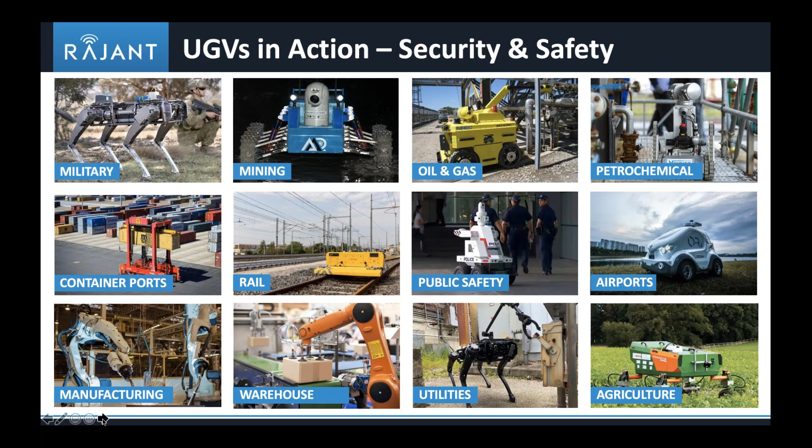Nothing really demonstrates this better than this animation, so if you'll indulge me, I'm going to play this video for you now. No matter the industry sector, every organization today requires a network that delivers real-time information reliably, anytime, anywhere.

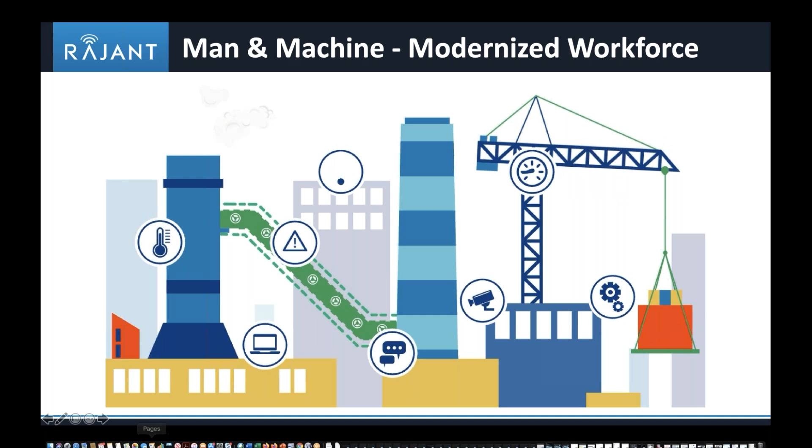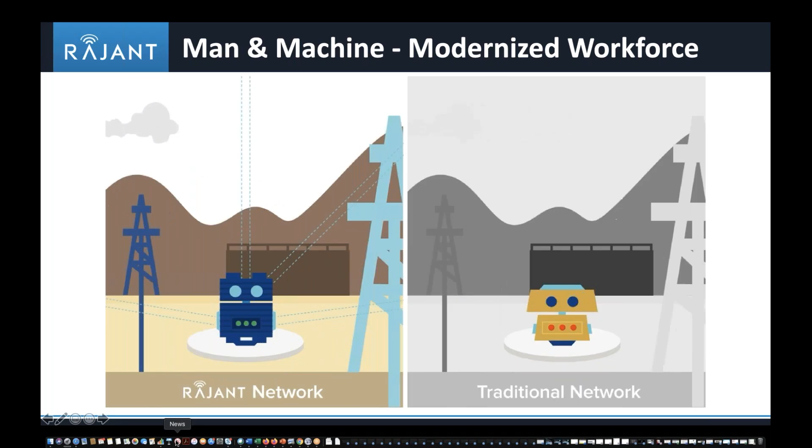Rajant's Kinetic Mesh is the only private wireless solution that can offer the level of mission-critical performance that modern mobile operations demand. That's because Rajant's multifunction breadcrumb nodes don't hand off like traditional wireless networks. Instead, our make, never break method of forming connections allows our proprietary protocol to switch instantly from one connection to another based on connection performance. Here's how it works. In a kinetic mesh network, all nodes are equal and can make multiple connections simultaneously.

A mobile or fixed node can direct traffic to any other nodes via multiple paths to ensure that you get vital information fast. Our patented Instamesh networking protocol orchestrates this traffic by always using the best path for each packet between network endpoints. With Instamesh, each node can maintain multiple peer connections simultaneously, making new connections whenever a peer comes into range, and retaining each as long as it is potentially useful to the mesh.

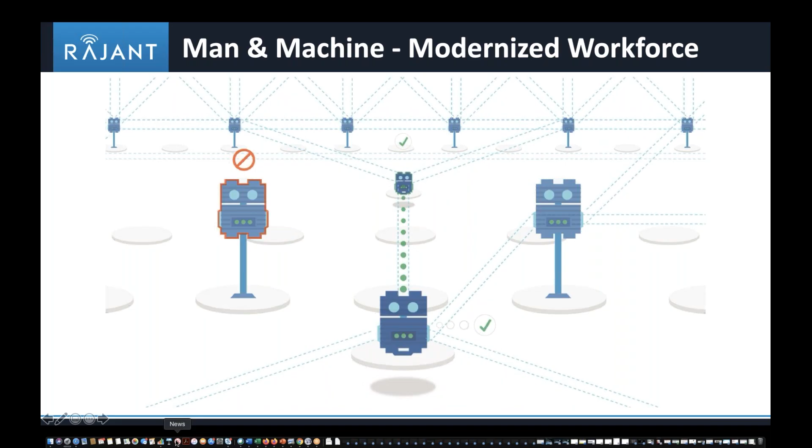If one path becomes degraded or blocked, the network will automatically redirect traffic to the best connection. As a result, connectivity remains continuous for reliable, real-time data delivery at low latency, even as the network grows. Kinetic mesh networks consistently outperform the competition in mission-critical scenarios due to their ability to make intelligent, autonomous routing decisions that result in a higher level of reliability, especially where mobility is required.

Take, for example, police responding to an automobile accident. With a properly designed Rajant network, dispatchers have visibility to the accident in real time. Police and EMTs have real-time mobile access to voice, video, and data to help coordinate first responder efforts while in transit, and can stream live video from the scene to required medical personnel.

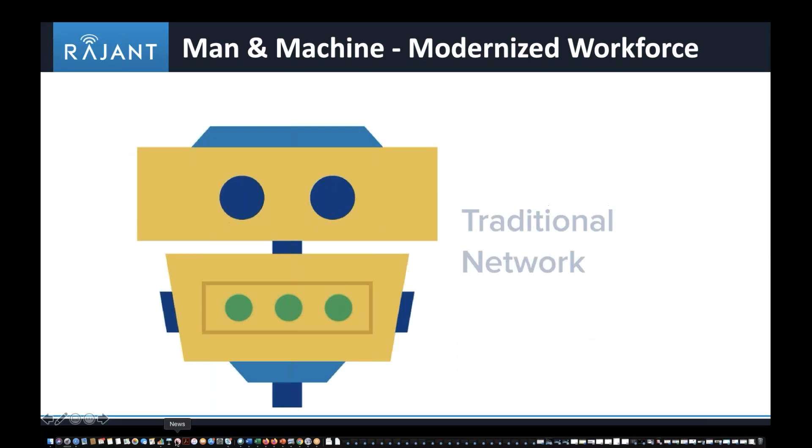By comparison, when mobility demands are high, traditional Wi-Fi and mesh networks often fall short. These networks typically employ break before make or make before break approaches to connectivity. In traditional break architectures, mobile nodes can only talk to infrastructure nodes, not each other, via a single connection.

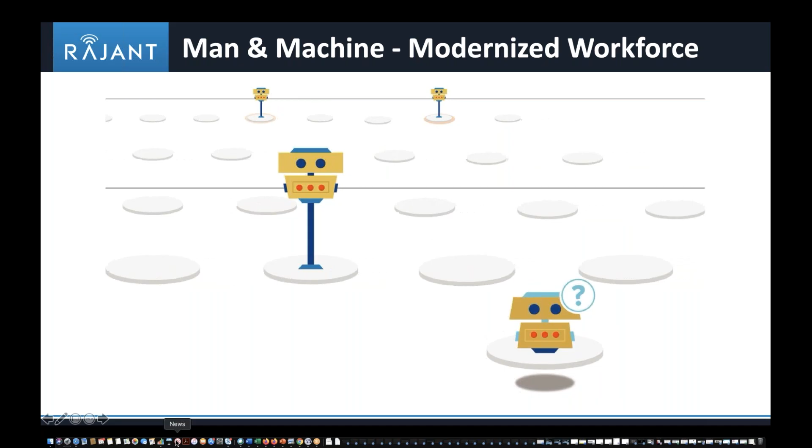When a mobile node leaves the range of its current fixed access point, it loses connectivity and must then find and reestablish a connection with the next access point along its path. Even if the network is able to scan for and determine its next path prior to handoff, it cannot use this newly made connection until the old one is broken. It still can only make one connection at a time.

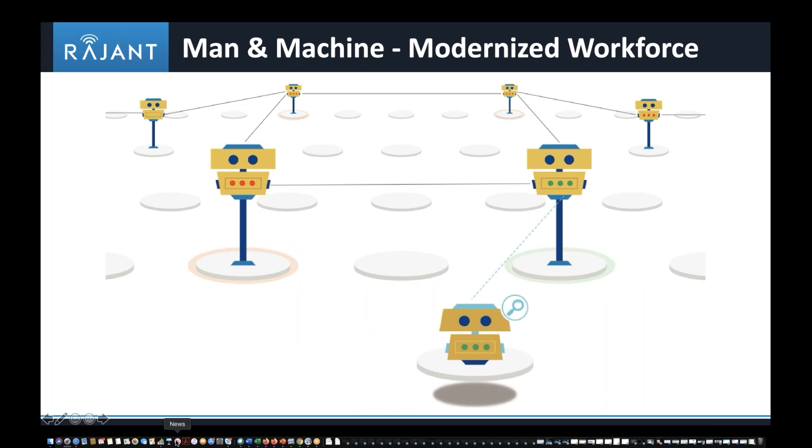Breaking connectivity over and over leads to dropped data packets, high latency, and compromised application performance. Degradation becomes worse when trying to scale to hundreds of roaming assets.

At Rajant, we believe that a network should adapt to support all voice, video, and data assets that reside on or traverse it, no matter how those assets change or move. We call this a living network. Don't settle for anything less than the mission-critical reliability of a living network, enabled by Rajant's make, never break approach. It's connectivity evolved.

To empower you with a deeper understanding that when it comes to supporting autonomous and robotic platforms, whether air, land, or sea, connectivity matters, let's meet Angela Quinn. A recent powerhouse addition to the Rajant team, Angela is a sales leader in the IoT and IIoT networking industry, as an individual and as a manager of global and national sales teams. Angela, the floor is yours.

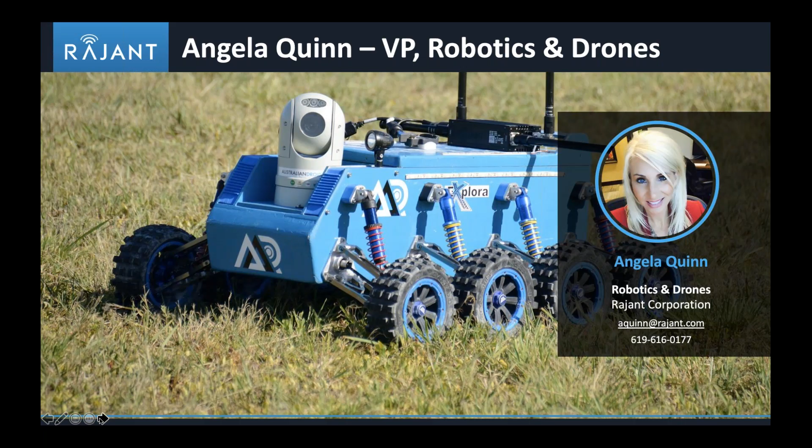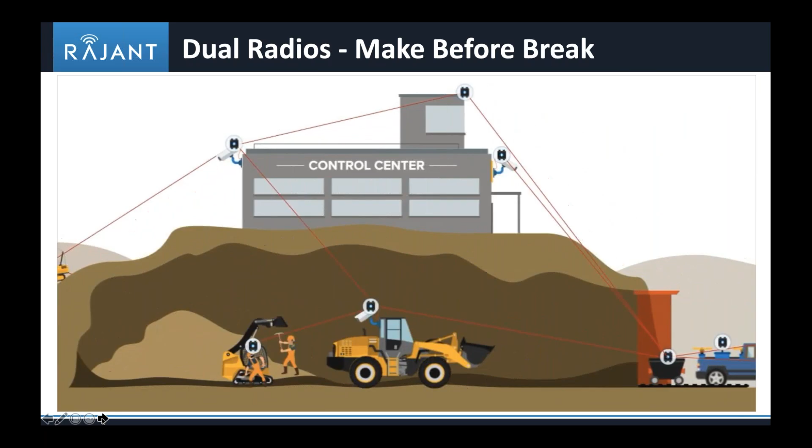In the next slide, we'll also be demonstrating, as you can see here, bots communicating directly, ground bots, as well as to buildings, cameras, manned vehicles, manned devices, IoT devices, and drones. This is a significant advantage as we are evolving and have evolved in small devices for the bots, drones, and IoT devices in environments, harsh environments where weather, dust, and environmentals are critical to success in mesh environments security-wise.

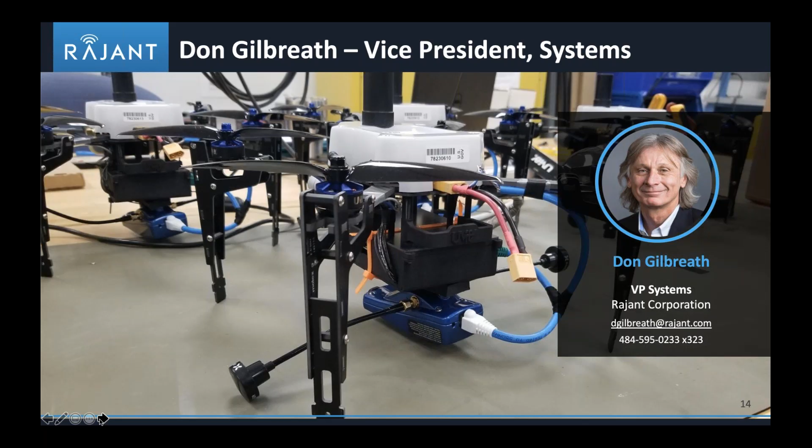What we've been using a lot recently is a new model, our DX2, which is our lightest model. It finds its way into not just aerial platforms, but some small, demanding kinds of ground robots. Next slide, please, Alice.

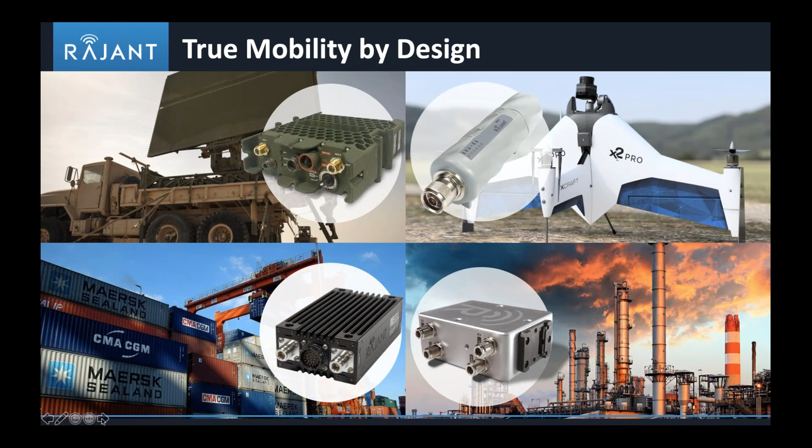That's called Offset. Offset's mission is a man-machine teaming operation with upwards to 250 air and ground robots, all interconnected and potentially operated by one operator, one swarm commander.

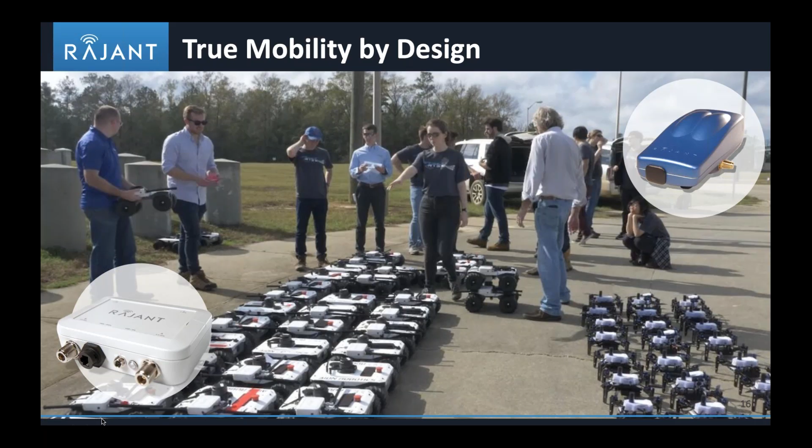Here's a great snapshot of a single team, a single fleet. There are about 70 or so devices here, and this was the February timeframe. Now we're starting to get out of this COVID lockdown area, and we should be turning on upwards to about 100 in the next month. The goal, again, is 250.

These ground robots don't have as much sophistication as some of the ones you're going to hear about next, but they do have simple LiDAR. They've got enough co-processing power to avoid falling off cliffs and running into each other. Their main job is to actually start doing gameplay. A classic example is these ground bots might be sent off to just explore an area, and DARPA made it easier for the play by providing QR codes called April tags, representing things like fuel or bombs, good things or bad things. When these robots come into scene, they find them.

Other robots are essentially bidding in real time to assist a particular find. A guy that might be a tanker says, "Hey, I need more fuel, or I could use fuel." And this level of gameplay is actually going on without any human operation. There is a swarm commander, but it's part of the gameplay: go explore, and robots that can help, please help.

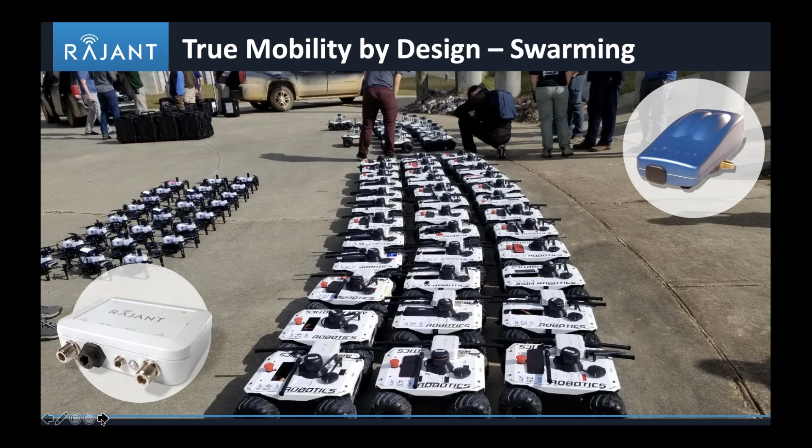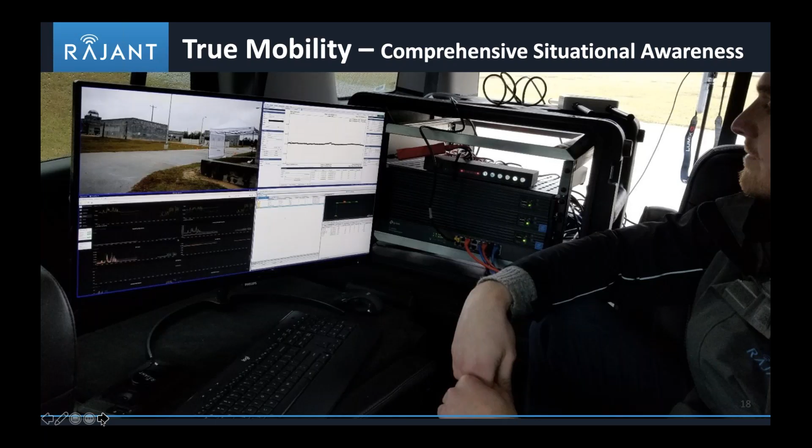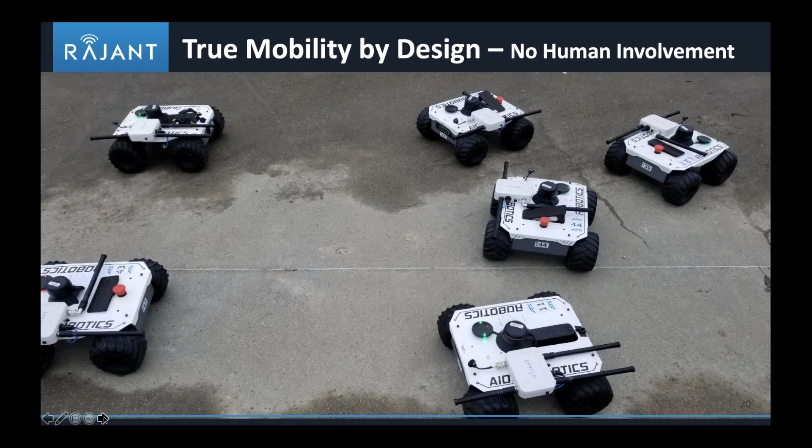This obviously plays well to public safety and fire, where you have this force multiplier of an operator who may have multiple robots, whether air, ground, or sea, that can assist in an operation—whether it's figuring out a fire line from a big fire, or breaching a building, or various applications that public safety might be using.

What's exciting to me is to see all of this truly distributed work come together, where there's not really a control room anymore. There's various stakeholders, but it's not the classic network that you would see, and it's not the classic robot case that you would see. That's why I'm very excited to be involved with this. I'd love to pass it on.

Yeah, those are super cool toys, Don. Thank you so much. Thank you.

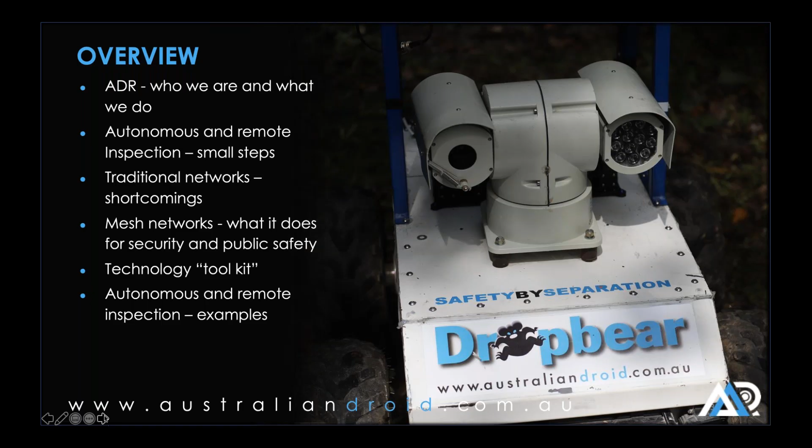Our mission is to provide safety by separation. So we provide, particularly for the underground mining environment, a range of high mobility robots that can be sent into areas where the ground is unstable, where there could be gas, or old workings where there hasn't been ground support for some time.

Typically it's gas sampling, laser scanning, and video survey. Again, we see separation, particularly the combination of new sensors, robotics, and artificial intelligence, allows you to separate personnel from hazards. We see separation as a new control, a new safety control that should slide into the traditional hierarchy of controls as the first choice.

As in security applications, military applications, and underground mining, there's similarity. You can't eliminate the hazard. It is part of doing your job. You can't substitute the hazard, but separation becomes a more powerful control than an engineering control. When an engineering control fails, the personnel and the hazard are still in the same place, co-located. But with separation, when that fails, your personnel are still safe.

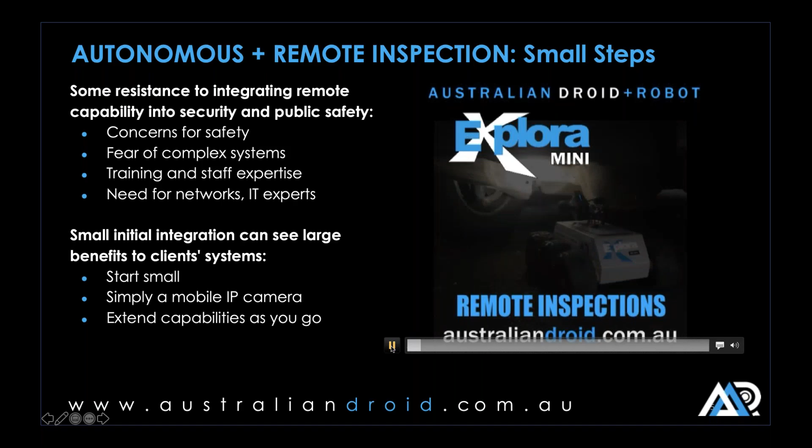One of the reasons that robotics hasn't expanded as quickly as it could have is that people really don't understand it. It's too complex, it's a bit sci-fi for them.

But in this example, you can see a small robot, which is like a remote control toy, doing an under-vehicle inspection. That vehicle is simply sitting there. In an application where a person would have to get under that vehicle, it would have to be locked out, the engine would have to be off, wheel chocks would have to be engaged, and you can't see what it looks like when the engine's running.

So this is simply a robot which is becoming just another part of a toolbox. For a mechanic, they've got spanners, they've got their engine analyzers, and now they have robots that they can drive under vehicles to see where exhausts are leaking and diagnose a number of problems. It is simply a tool that goes into the toolbox.

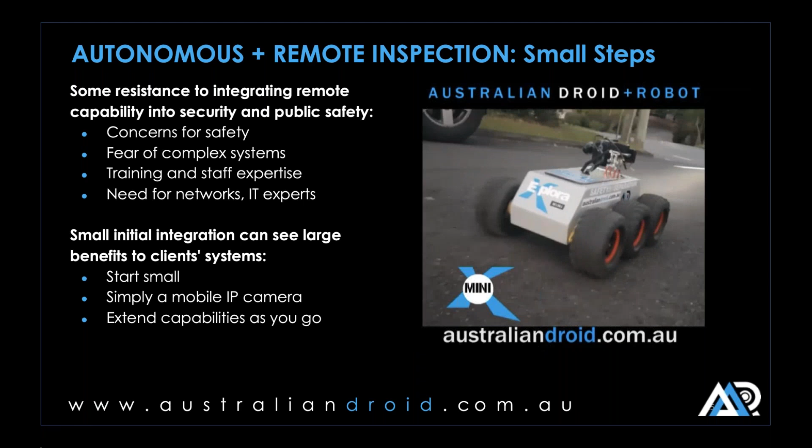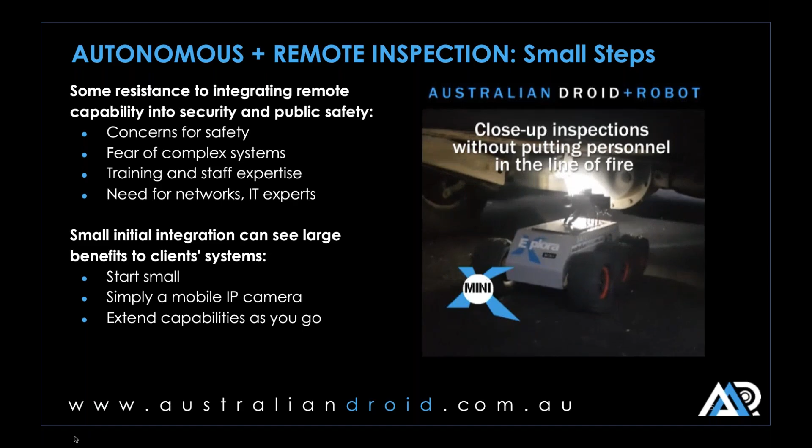As we say, start small, and that robot is line of sight controlled. But when you have multiple robots or you need to project beyond line of sight, that's when we bring in dynamic mesh networks, and we can deploy a number of robots that relay from each other to do more complex inspections. But for any application, particularly security applications, start small.

Just have one robot and then build on that system. And the beauty of our products, and the beauty of the Rajant products, is as you build, they just plug together and you can expand. Next slide, please.

The beauty of a control room connected via network is that, in a situation, you can launch drones, you can send out ground robots, you can launch fixed-wing drones as surveillance platforms, and we'll cover that later. Instantly, in any event, instead of sending people out to find out what's gone wrong or what's happening, you have a much expanded situational awareness where you can be looking down from above on your entire operation.

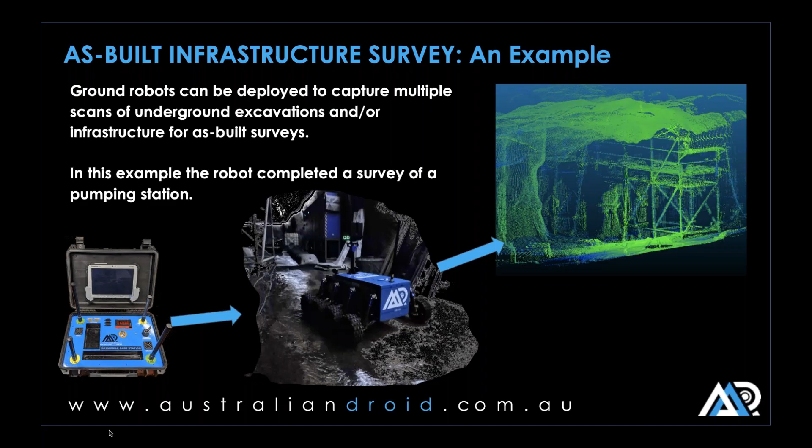So this is a typical example of one of our robots. There is a mine that wants to go into old workings. They have a lot of bats in the old workings. They can't send machinery in because the bats are protected and the machinery can hurt the bats.

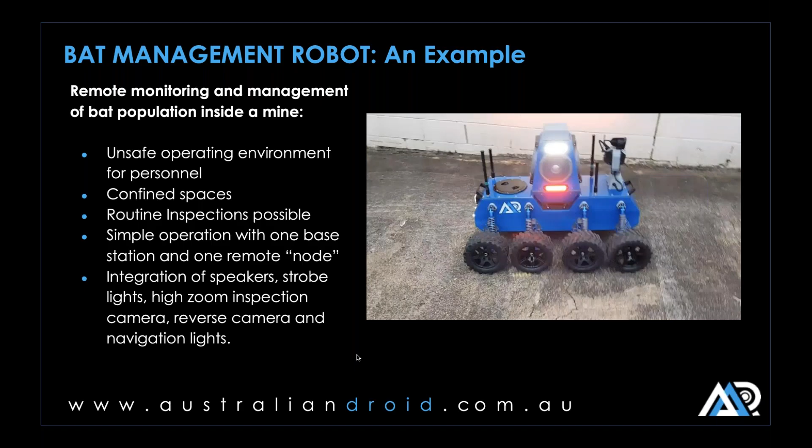So we have a robot that can go a long way into that mine with lots of flashing lights and loudspeakers that can, one, look and see where the bats are, and two, hopefully encourage them to move out. And this robot is just an extension of a person.

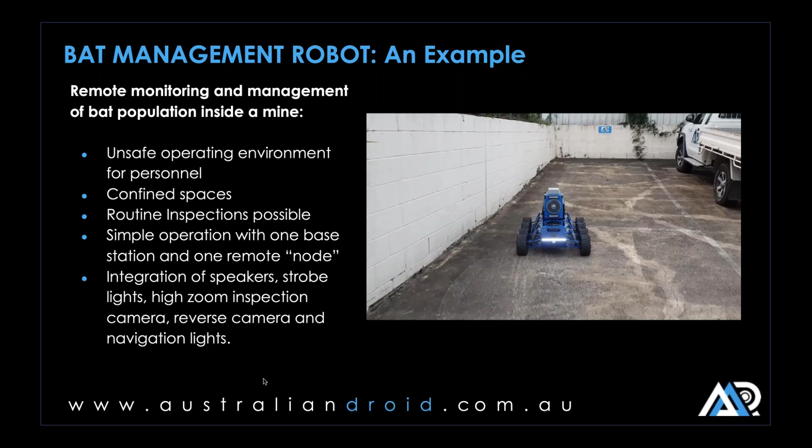Again, it's just a tool. It means that when you get to site, it's another tool you pick up and allows you to do work remotely and safely. It's man and machine working together. It just extends your reach and provides also that separation and safety.

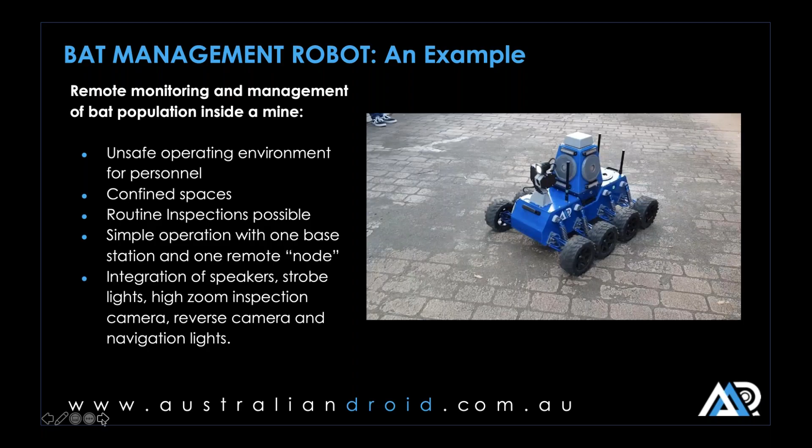So again, a typical example in a mine. In this case, we're exploring an abandoned mine to see what the situation is. There's a bulkhead in the mine that was holding groundwater back. So what we would do is we would send one ground robot 100 meters into the mine to the first intersection, and then send another one to the next intersection, relaying the signal and extending our reach.

Once we've established that network, same as the case in Don's 75-robot mesh, you can then send high value assets in, knowing you have a robust and stable network to do what we call the end effector. So we put essentially almost disposable robots in to see what's going on. Once everything's established and we've seen what the conditions are, we'll send the end effector in to do the job. But again, the person sitting outside the mine in the beautiful Queensland sunshine controls everything remotely. And it doesn't matter what happens in that mine, that person is not going to be exposed to hazards. It's just an extension of your capability.

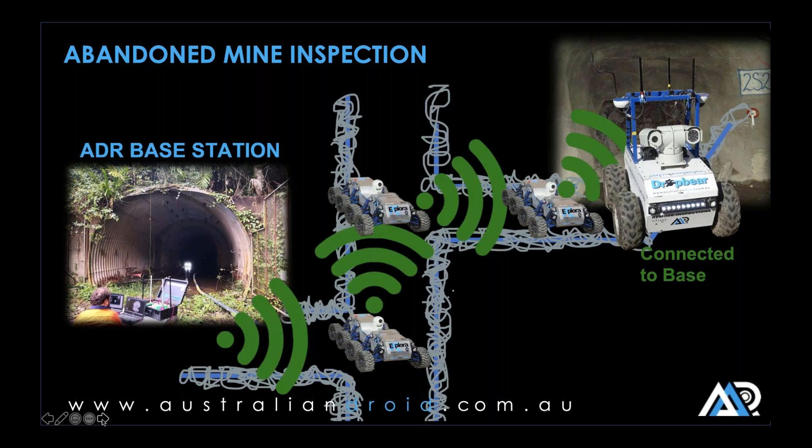But this is the typical thing, if you're in a situation and you're in a security control room and you're guarding an asset and you see something happen, or a sensor goes off, or you think something's happening outside, what's the first thing we do? We send a person out. We send that person into danger. Instead of sending the person out, just throw this thing in the air and go have a good look from above.

The camera on this is just like your typical security camera that's bolted to a pole on the ground, except that it's 500 feet up in the air and it's providing exactly the same video feed. And you can add multiple drones, multiple robots you can send out to see what tripped the alarm, or just to do a continuous patrol of the premises.

Forget the fact that it's a robot, forget the fact that it's a drone. It is simply a mobile camera. It's like picking up one of your security cameras and just throwing it somewhere in the sky. Because all of these vehicles are autonomous, you can hit a button, they will launch and they will stay in one position for as long as you have battery. It is like having a 500-foot steel pole with a camera on top that you can move around. It just extends - we pay hundreds of thousands of dollars for our security network, and this expands it very cheaply and efficiently. Okay, next one, please.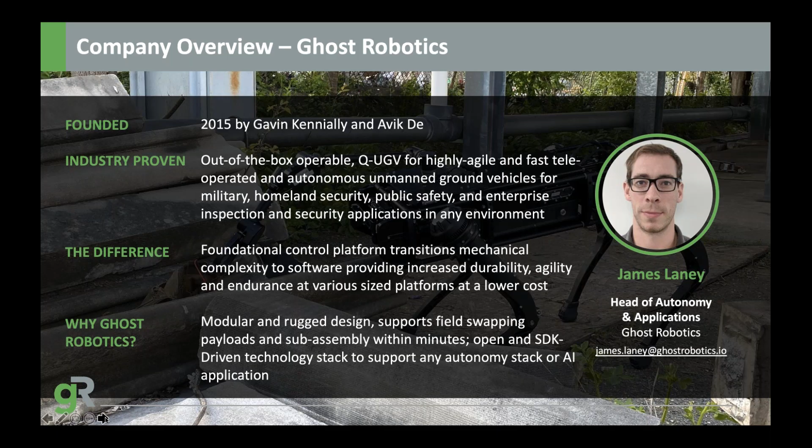James Laney, thank you for joining us, please tell us more about Ghost Robotics. Yeah, so at Ghost, we believe that the static robots of today will give way to dynamic legged, wheeled and tracked platforms, and eventually have these mechatronics and organic hybrids with thousands of actuators to really capture the behavior fidelity of life. So we believe it's not a question of if, but a question of when. And that's what we're focused on building at Ghost, is the core control and the foundation of those systems, to be able to capture a robotic system that's able to exist in the wild and really surpass our current state of the art.

So why legs? Well, as you saw in some of the examples, the wheeled platforms are only so big. When you have legs, you're able to navigate all sorts of different types of terrain, especially when you get into the situations where you don't want to send a person in, where you actually don't know what the environment is. You just have so much more flexibility, having the ability to control all your many degrees of freedom.

We also, with our unique electronics and control design, allow us to have much higher endurance than some of our counterpart vehicles and drones, and reach up to 7.8 miles with our current robot, but soon with a larger battery, we'll be able to hit something closer to 10 miles. But many ground-based platforms are very small and short. However, with the legs, you have much higher vantage points, which really gives us better operability and presence right off the bat, without having to put a boom or a mast that can get stuck or make it difficult to navigate the robot.

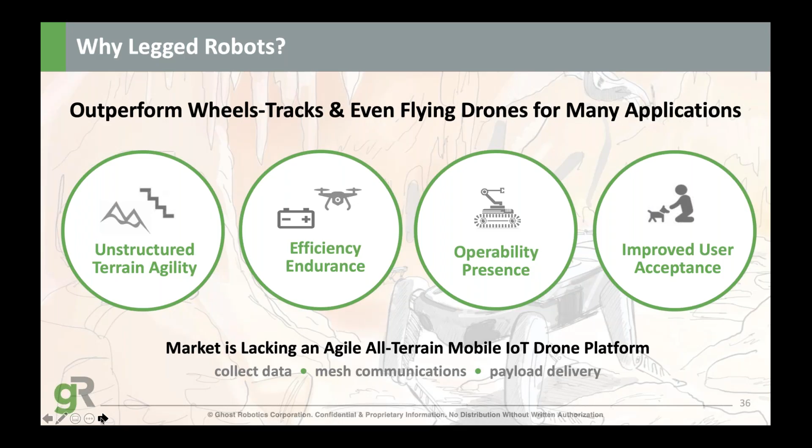So this is a glimpse of some of the projects we're working with. Right now, a lot of our big projects focus primarily with the DoD across various agencies, and just now with our latest robot, we'll be getting more into our enterprise customers and looking more into inspection and security.

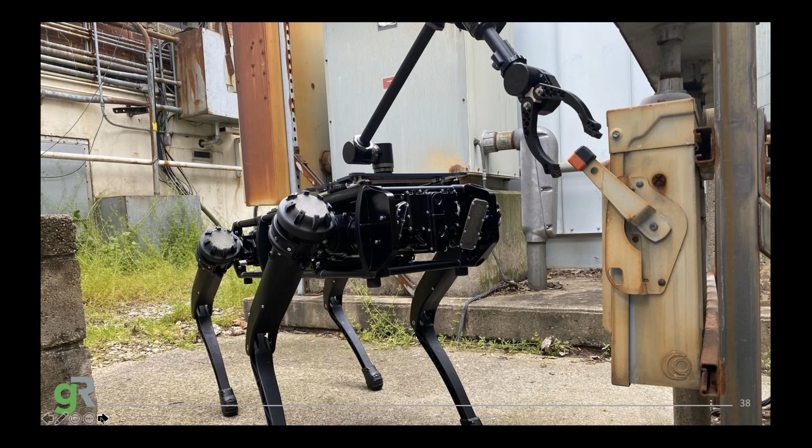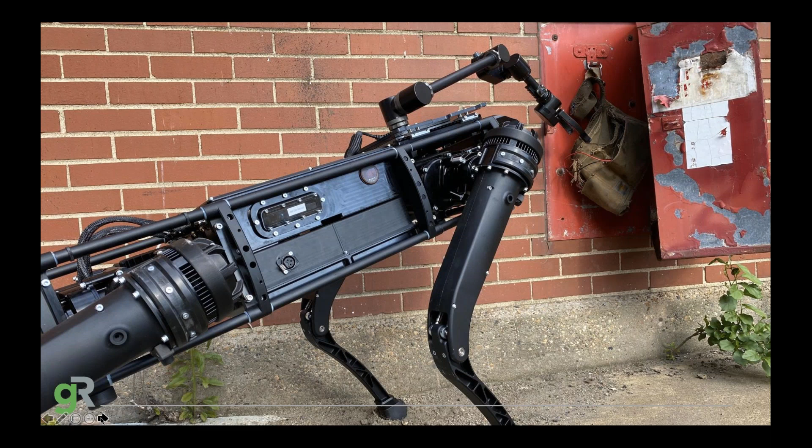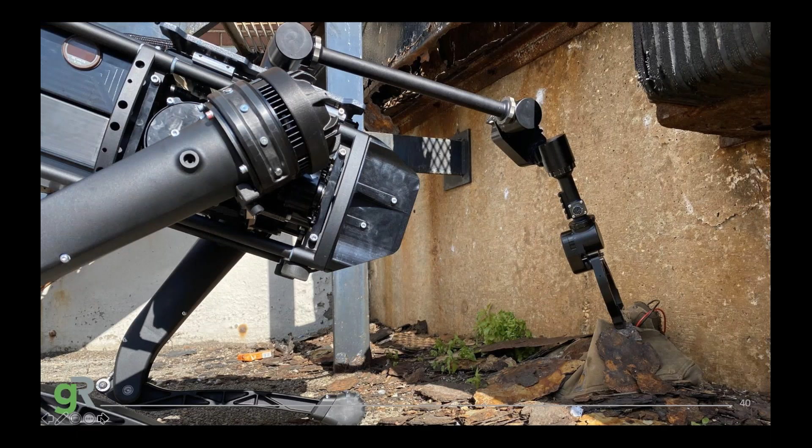So this is our latest robot, the Vision 60 V4, which will begin shipping next week. Over the course of the month we'll ship about 20 of these before we build another batch. That's something pretty different for how we look at building robots - we build, break, and fix our robot at very high scales. About every quarter we release a new robot, get it out in the field, get feedback from our customers, and try to integrate that with the next revision, with our final enterprise model done later in the fall, and our military version finished early next year.

Looking into some of the projects and use cases, one of our biggest is ISR, ISTAR - Intelligence, Surveillance, Target Acquisition, and Reconnaissance - which is really just a fancy word for remote inspection. Currently we're working with a number of DoD agencies, all seeking to use our bots to extend the reach for a variety of missions and take humans out of the equation and out of harm's way. In the upper right, you can see our robot participating in an Air Force exercise providing strike targeting data for a battleship off the coast several miles away. In the lower right, you can see our bots scouting ahead, ensuring the area is safe before the troops continue.

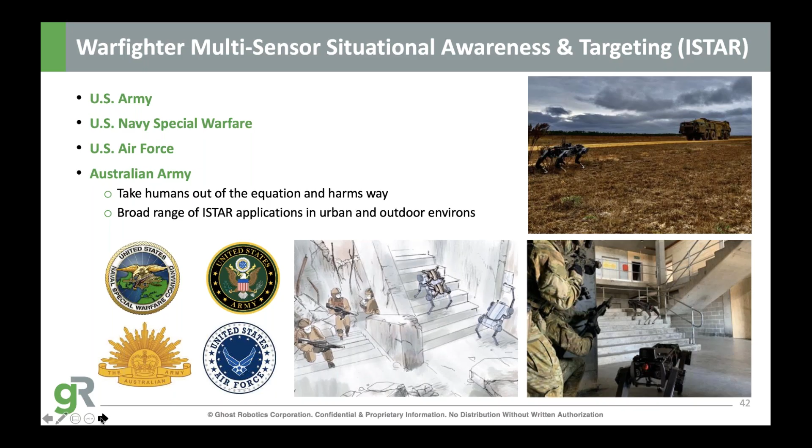Some of our newest interest has come from the CBRN area for chem, bio, radioactive, and detection use cases. What used to be very expensive and heavy sensors are now being shrunk down and becoming lower cost. So many organizations are looking to use our bots to mount a variety of sensors to make the ultimate CBRN detection robot, to sniff out hazardous materials, volatile compounds, or even drugs in some cases.

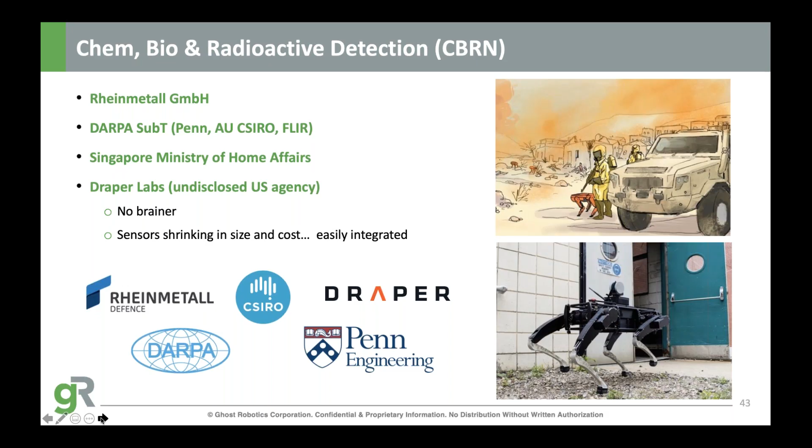But the same robot we're designing for the military that can live and exist in these harsh conditions and operate in any environment is the same robot needed for something closer to home, for public safety and emergency management. All we need to do there is swap different types of payloads, and we've got a different robot able to adapt to a different use case and leverage various machine learning or computer vision algorithms to enhance that capability.

And of course, with our longer ranged endurance, we see that our robot is able to extend and augment the fixed sensor systems used to secure various bases or perimeter patrols, enhancing that capability to provide 24/7 autonomous security in these types of applications.

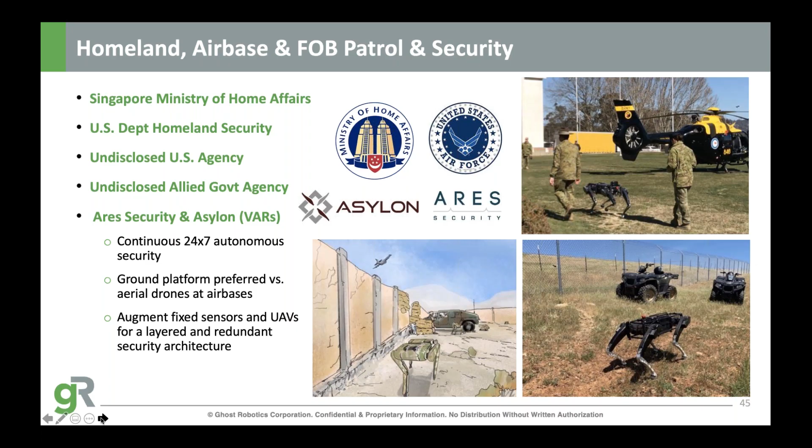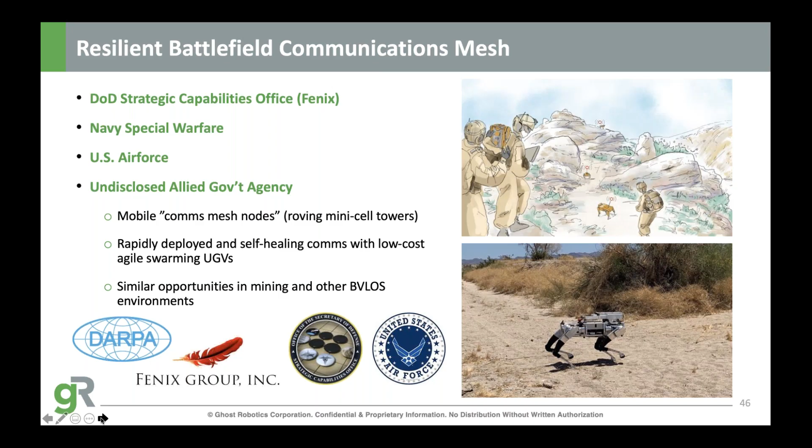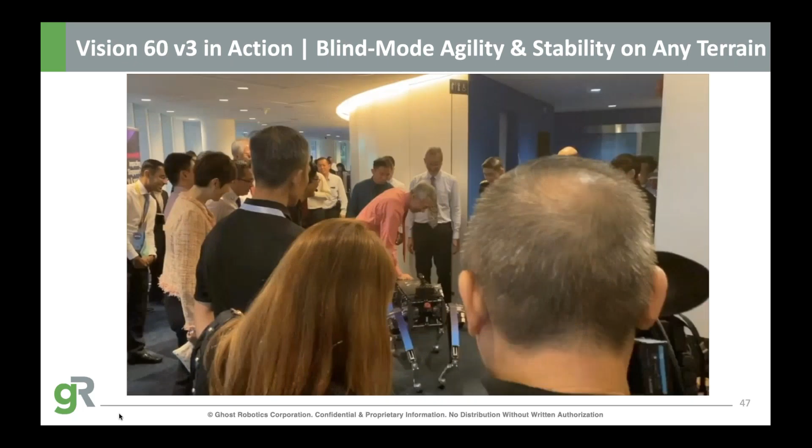This is a video montage of our older robot, our version 3, that's getting replaced by the version 4 coming out soon. This is the Prime Minister of Singapore actually trying to shake the robot, proving the stability of our system.

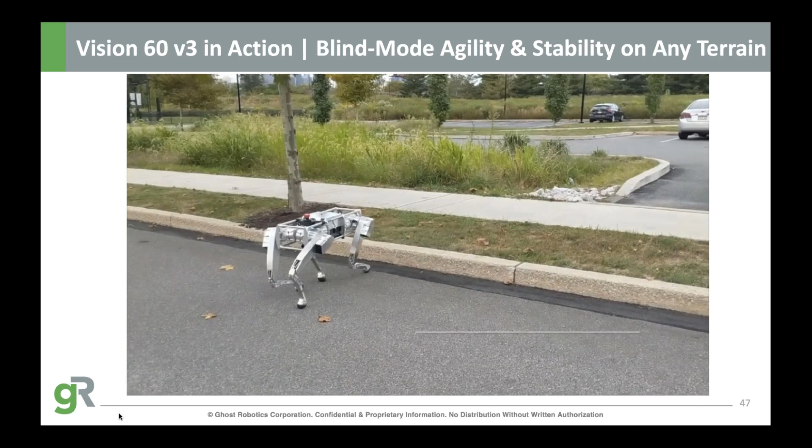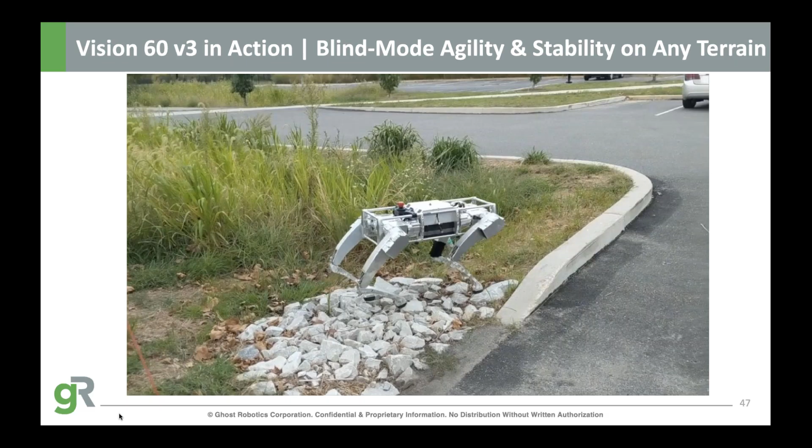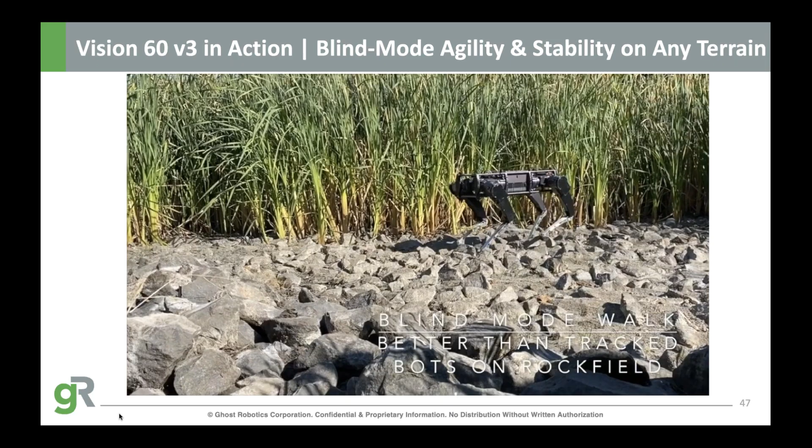Everything you're seeing here, the robot is operating in what we call blind mode. That means it's operating without any preconceived notion of the environment around it. It doesn't know there are rocks or curbs. All it's able to do is react, and it can do this very efficiently and quickly with our control system that allows it to maintain stability and act as the reptilian brain.

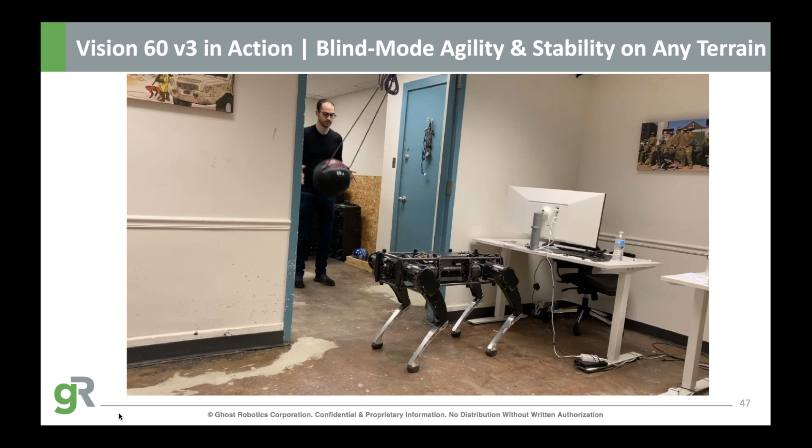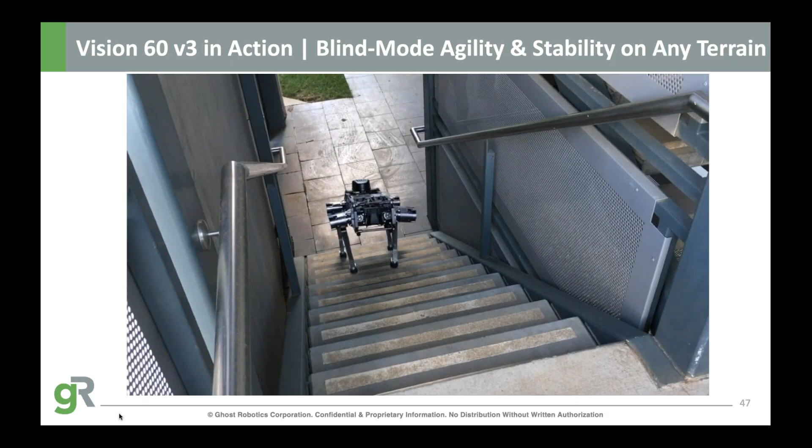Here you can see my colleague Gavin, the co-founder, perturbing the robot with a heavy medicine ball, and you can get a glimpse of how fast the robot's able to react and maintain stability, which is important when getting into environments where you don't know what it's going to look like. Your sensors can fail all the time, and this happens in various environments, but that core stability platform is there under the hood to make sure the robot stays stable.

Again, this is another example of the robot able to traverse up the stairs without having to rely on its vision sensors to know the stairs are there.

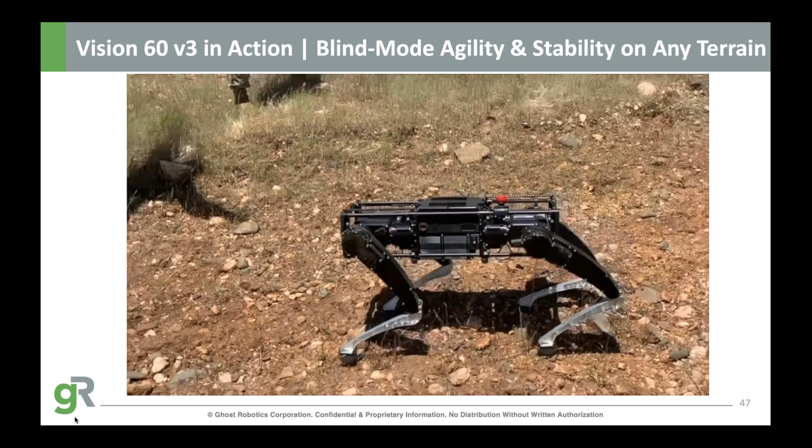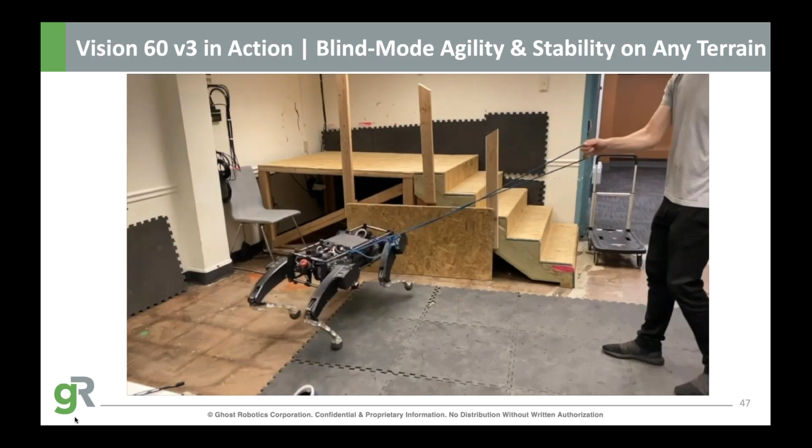Here you're seeing the robot given a simple command to go forward. The video didn't do it justice, but it's extremely steep. The robot is carefully placing its next foot, doing so from its internal sensors to feel the ground underneath its feet.

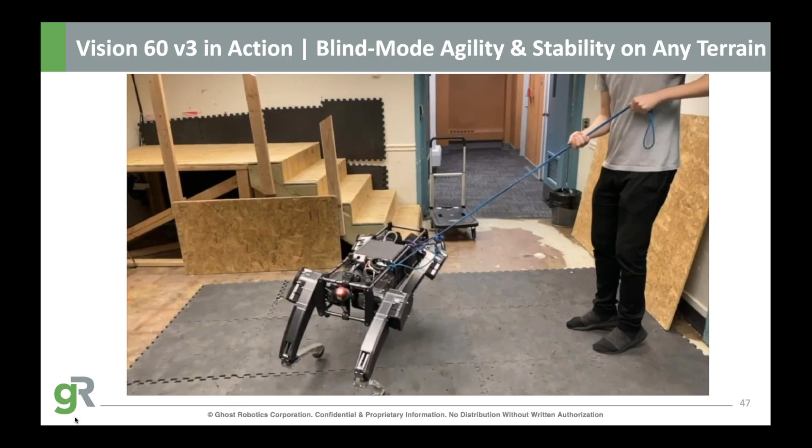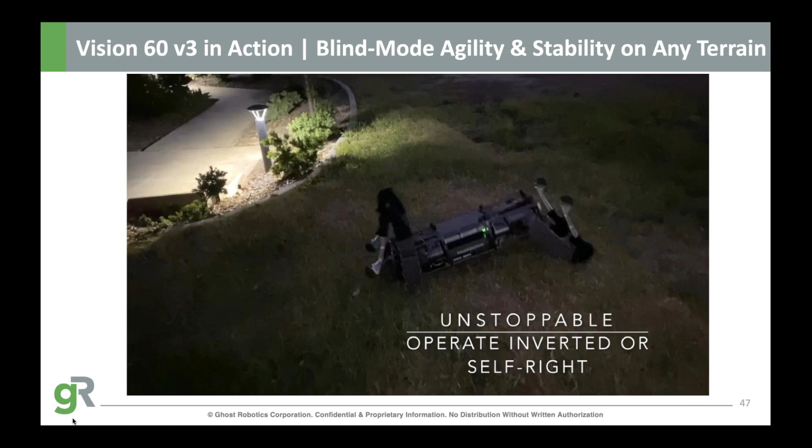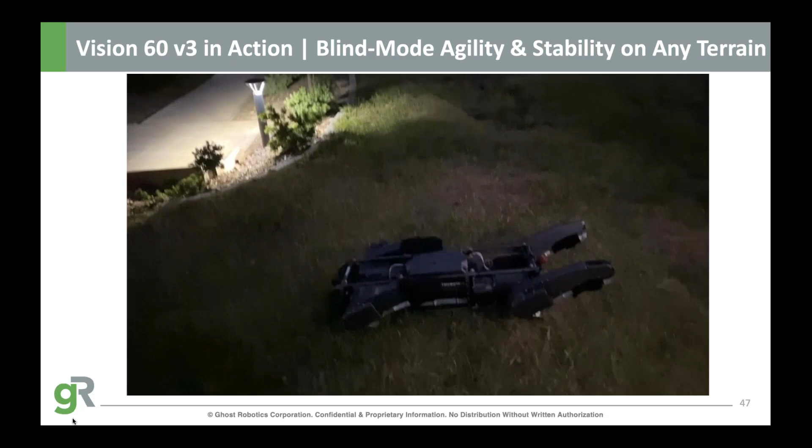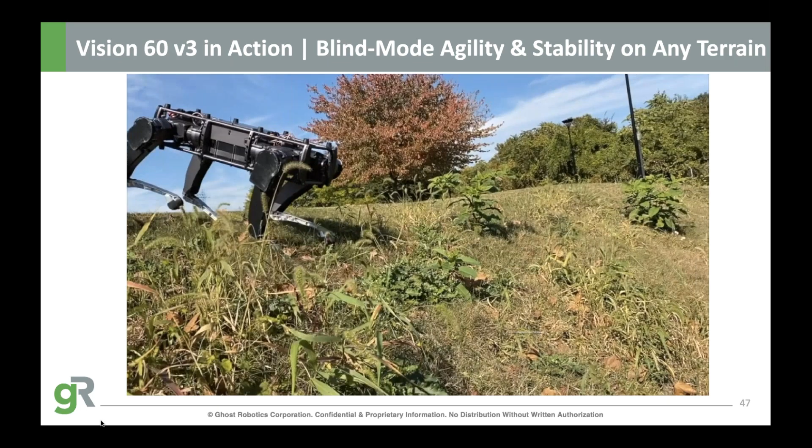One interesting thing about our robot is it can operate completely inverted, which is important in some applications where you get in and don't know what's happening, but it's also able to self-right itself. This capability is baked into the core platform, so depending on what's going on, the robot can decide to self-right or operate completely inverted, because at the end of the day the robot just needs to get there.

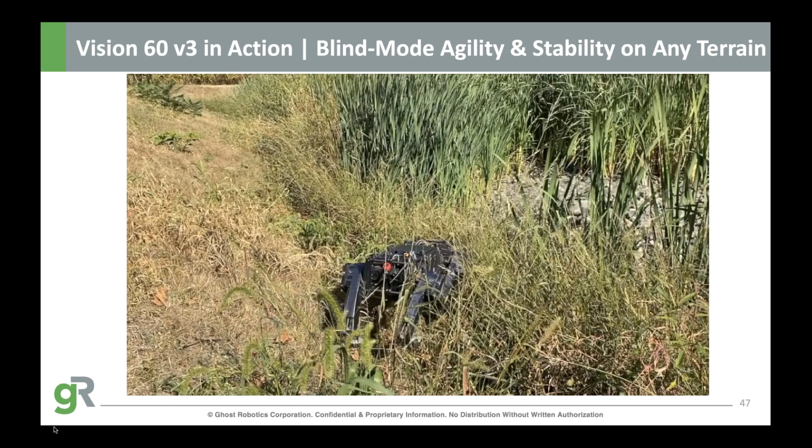It needs to do the task. It needs to provide the data back, the comms, and get the information to the user to allow them to make important decisions.

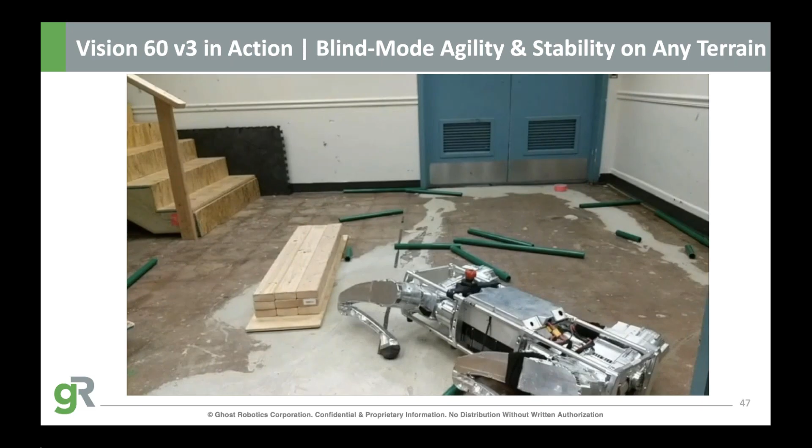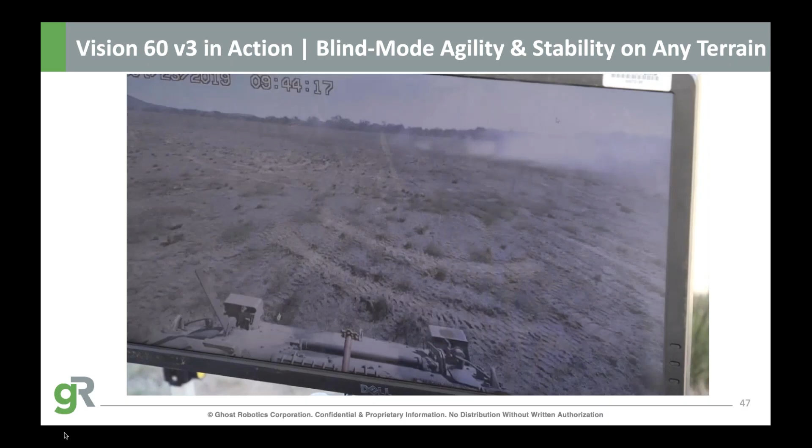Again, just trying to show the stability, the robot's also able to think and say, hey, I'm getting a little too disturbed, and actually drop down into what we call the cat pounce to get back up and re-engage this stability. With all of that put together, that makes for a core, foundational platform that when brought into the field is reliable, is stable, and can go just about anywhere.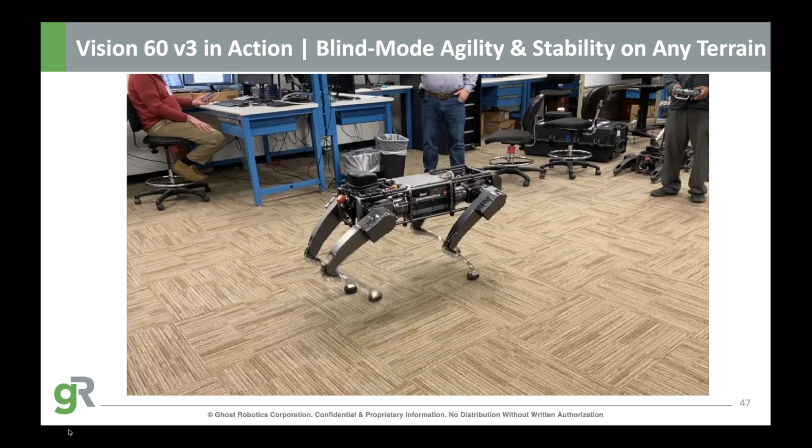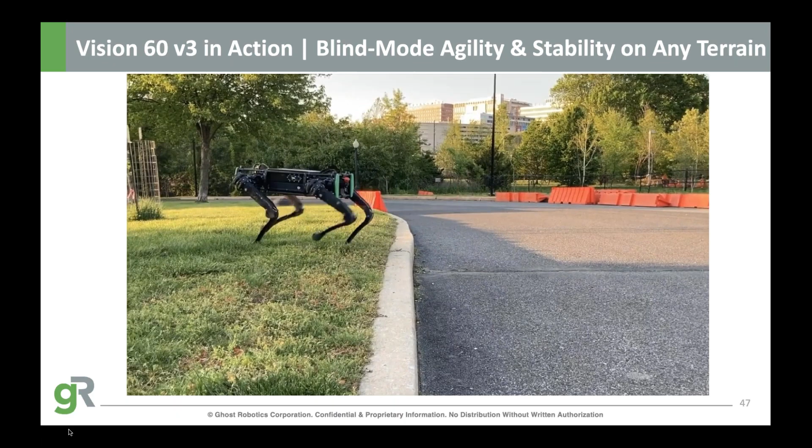This is some later clips of our version 3. This is the one we're about to ship, going around our facility, giving it a little test run.

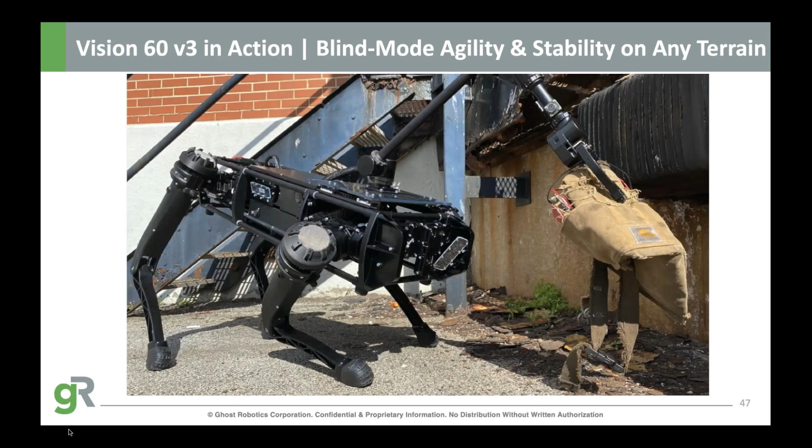So how do these robots work? At the top, it's a modular system. The legs, the sensor head, the compute box, the battery box - all of these components can be removed and are field repairable in under 2 minutes. All of them are enclosed themselves, IP68 for our newer versions, which is important for these types of environments.

One of the things that allows us to be so reactive is we removed all the hardware complexities you find in traditional legged robots. There's no springs, force sensors, or other complex mechanical actuators - we do all of this in software instead. This allows our platform to be so dynamic, but also allows us to scale it to various sizes.

In the table below, you see the Vision 60 - that's the model you've seen in the video. It's our flagship robot, but we're also able to build robots a bit larger and a bit smaller, up to a certain size scale. We have another robot we call the Spirit, primarily for R&D, not displayed here, but that's a much smaller robot that uses the exact same control algorithms, the exact same software, and the exact same electronics, just scaled down.

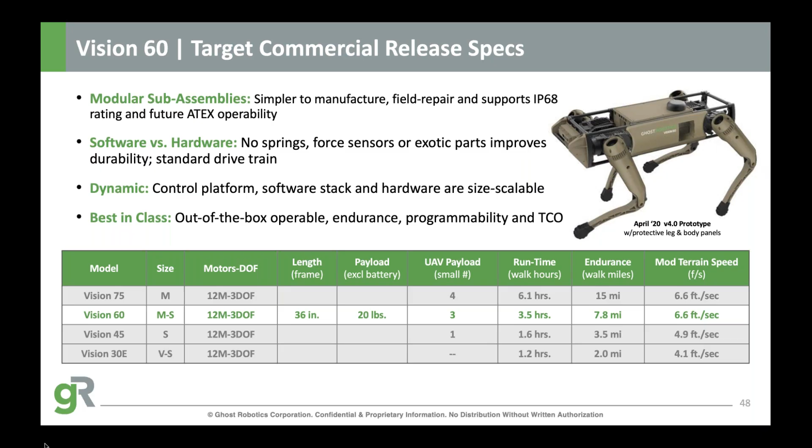Looking a little deeper, one thing that's pretty unusual for these types of platforms is we provide all sorts of ways for customers to engage with the system itself. We have a low-level API which allows customers to go in and reprogram the gaits at the joint level and teach it all sorts of new behaviors. Some of our research customers have trained the robot to do backflips and cartwheels, climb fences we've seen in some of our other robots, which really opens up the capabilities and allows customers to design what they need for their application.

On top, we've got an NVIDIA Xavier that's able to process all the sensor feeds you see on the right, which is really important when we're trying to establish a system that's able to negotiate and navigate all of the unknowns you want to send the robot into. And all of that's accessible from a high-level API to interface with various ground control stations, different remote controls, different autonomy level layers, providing kind of the all-be-all robot platform for your remote sensing applications.

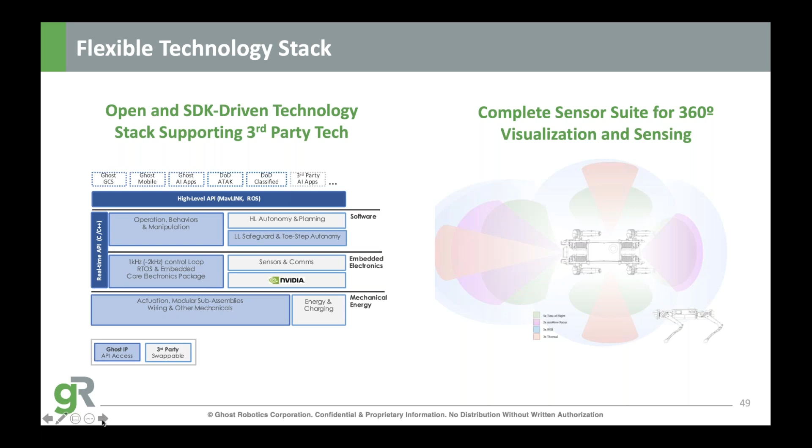One thing the Penn team did very well was manage comms, and so the entire time the robots were always communicating with each other inside the mine. It was done so well that some of the other teams came and asked us about the types of radios we were using, and one of them has now switched to the Rajant system. This really shows how important it is to have connectivity in all these unknown environments, and Rajant's really been able to prove that to us here with the Subterranean Challenge.

Thank you, James, that was awesome. Terrific overview of man and machine learning about what the right network can do to empower UGV integration for security and public safety. I most appreciate your diverse perspectives on this topic, from Angela to Don to Joe to James. Rajant's slogan is, if it's moving, it's Rajant.

To be a security force multiplier, UGVs require a fully mobile, fully redundant, resilient, and multi-pathed and secured network. Whether on wheels or on legs, as we saw, Rajant's kinetic mesh enables man and machine to effectively tackle those dirty, dull, and dangerous safety and security applications of today.